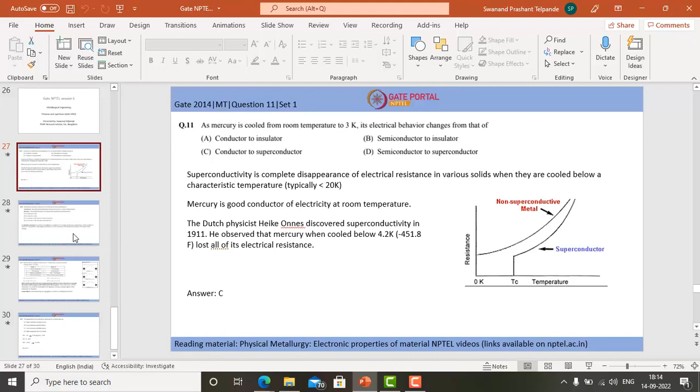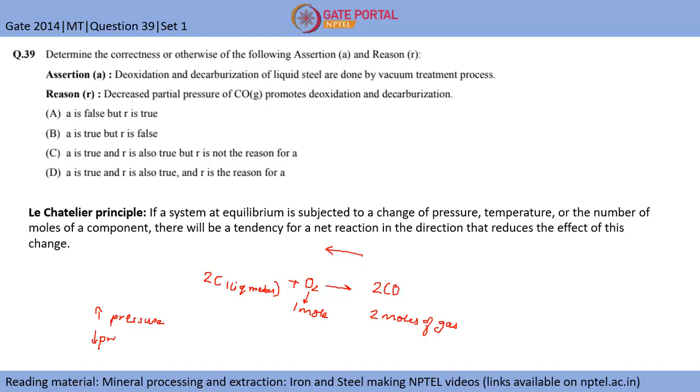So let's say we apply more pressure; let's go the reverse way. If high pressure is there, 1 mole of gas is giving 2 moles of gases. So if we increase pressure, the reaction will move backward, which will in turn increase the carbon content in the material. Now let's go the other side, decrease the pressure, which basically means vacuum creation.

Now according to Le-Chatelier's principle, as the pressure is decreased, this reaction will move towards the right. So more carbon monoxide will be there, hence this will drop. The concentration of carbon present in the liquid metal will drop. So deoxidation and decarburization of liquid metal are done by vacuum treatment process because of this reason.

And the reason they are stating is that decreased partial pressure of carbon monoxide promotes deoxidation as well as decarburization, which is true. So the correct answer is option D, where A is true and R is also true, and R is the reason for A. Basically we have to generate more carbon monoxide so that the carbon should be out of the metal.

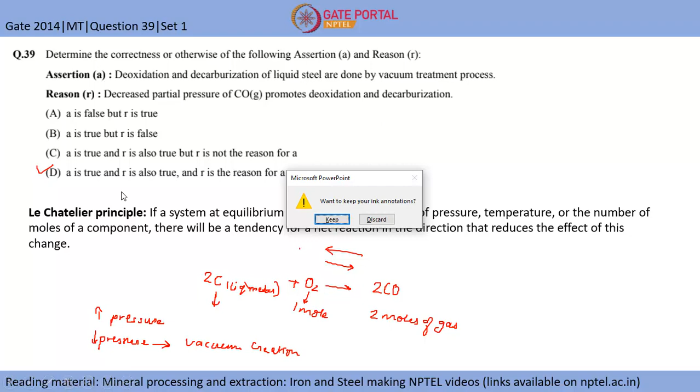I hope this is clear. Is this clear? Le-Chatelier's principle.

Okay, so basically you need to learn in extractive metallurgy. The basic point is you need to know what reactions will be there in what cells. If you consider deoxidation, then some deoxidizers are added, like aluminium, so alumina will precipitate out in slag. So in these conditions you need to know what is the exact thing.

So the main thing in extractive metallurgy is you should know all the reactions, you should know Le-Chatelier's principle, and you should be able to apply it correctly to answer whether vacuum will assist things or whether high pressure will assist the reaction. The effect of pressure, effect of temperature, and effect of moles, how all these three variables play a role in whether the reaction is moving forward or backward. That you need to know in extractive metallurgy, and these types of questions will be repeatedly asked.

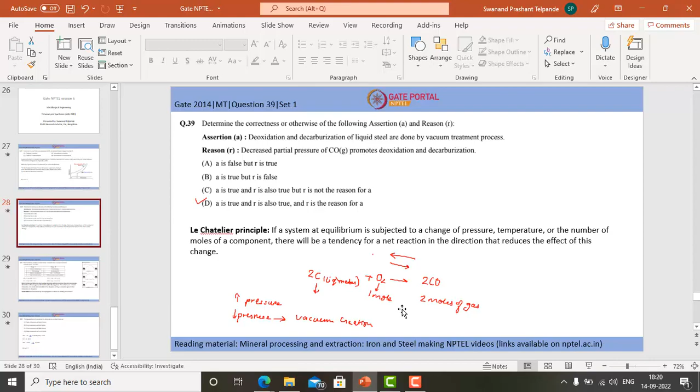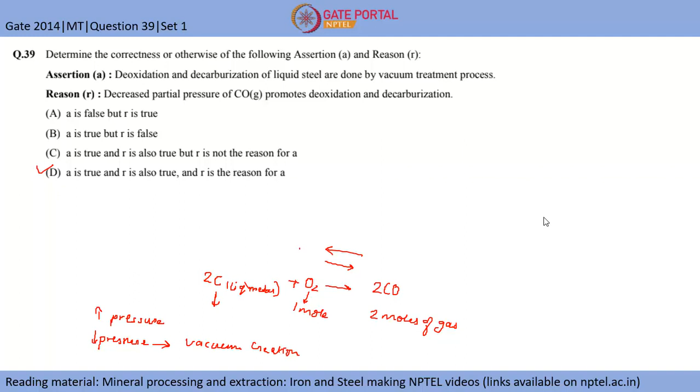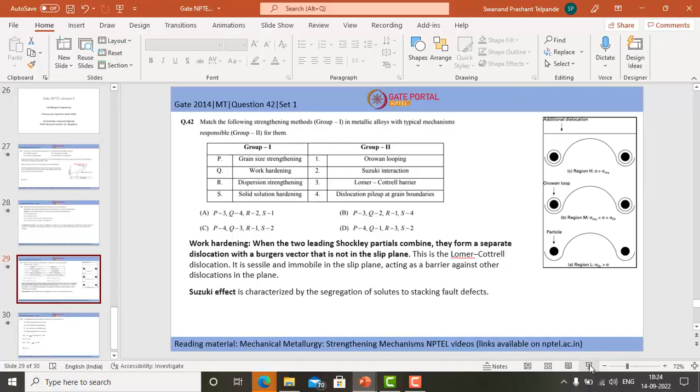This is question number 42, GATE Metallurgical Engineering 2014 question paper. Match the following strengthening methods in group 1 in metallic alloys with typical mechanisms responsible in group 2. Group 1 consists of grain size strengthening, work hardening, dispersion strengthening, and solid solution hardening. And the mechanisms are Orowan looping, Suzuki interaction, Lomer-Cottrell barrier, and dislocation pileup at grain boundaries.

So firstly, what is grain size strengthening? Grain size strengthening is also termed Hall-Petch strengthening. In Hall-Petch strengthening, let's say we have a material with larger grain size, and a material with very small grain size. So this is a material with small grain size. When dislocations are coming, they are stopped by this grain boundary because the orientation of this grain is not the same as this grain.

So Hall-Petch tells us that when these dislocations come to this grain boundary, we require additional stress for the dislocation to start slip in this grain. If I zoom in, consider this as one grain. The orientation of this grain is like this, whereas the orientation of this grain is like this, and these are the slip planes. So if this dislocation encounters this grain boundary, we require additional stress so that it moves on this slip plane in the neighboring grain.

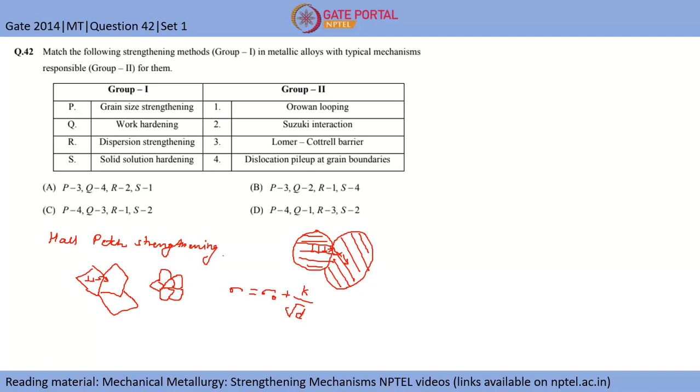Sir, one minute. Sir, please repeat again. We require additional stress for... Okay, I will repeat it. Just a second.

So let's say I have 2 grains. These are the slip planes. Let's say we are taking an FCC material and these are 111 planes. My loading axis is this; I am loading it like this. So these 111 planes are at 45 degrees to the loading axis. So the slip will initiate in this grain first, right? Because it is 45 degrees, the shear stress will be maximum on these planes.

Now consider another grain, where the 111 planes are differently oriented. Let's say it is like this. So let's say this is a gliding dislocation on this plane. It encounters a change in slip plane, right? So it does not have enough energy to cross this grain boundary and start moving on this slip plane here. So this dislocation will get stuck here near the grain boundary.

Similarly, more dislocations slipping on this same plane will come near the grain boundary, which will lead to the pile up. This pile up near the grain boundary will create certain stress, and when it reaches a threshold stress, the dislocation will jump onto this slip plane and start slipping on that plane. Hence this increase in stress required for the dislocation to go into the other grain and start plasticity in this complete grain is basically the grain size strengthening.

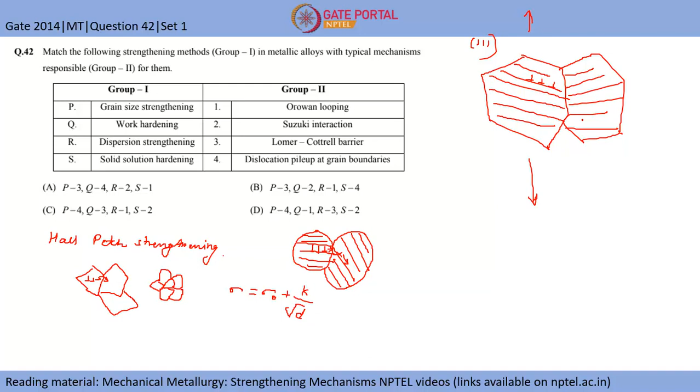Now coming to work hardening. In work hardening, let's consider the case of an FCC material. In FCC material, as you may know, Shockley partials are there. When two Shockley partials combine, they form a separate dislocation whose Burgers vector is out of the plane. Basically this plane is the 100 plane. Two Shockley partials moving in 111 planes combine to form a different dislocation with Burgers vector equal to the combination of B1 and B2, which lies in a different plane, not a 111 plane.

If that occurs, this dislocation, the combination of these two Shockley partials, cannot move because that is not the slip plane in FCC. So this forms a sessile dislocation, meaning the dislocation cannot move. Hence, if this dislocation is present in a material, it will cause trouble for other dislocations which are easily gliding. This is known as the Lomer-Cottrell lock. As it is sessile and immobile, it acts as a barrier for other gliding dislocations in that plane. Hence the work hardening is because of the Lomer-Cottrell barrier. So the correct answer for work hardening is option 3, Lomer-Cottrell barrier.

Now coming to dispersion strengthening. I will just draw. Let's say I have a material where different grains are there, and I have fine dispersoids present throughout each grain, and these dispersoids are incoherent with the matrix. I guess you know what coherency and incoherency are.

Basically, let me tell you, there is a slight difference between precipitate hardening and dispersion hardening. Here you can see the structure of this precipitate is like this, whereas in the matrix it's like this.

So what happens if this structure of matrix is coinciding with this? You will have coherent precipitate. Basically all these bonds will be attached to some or the other. So this is coherent precipitate. Now go on increasing the disorder of this matching.

So let's say I have a precipitate which is oriented like this, and I have a matrix like this. So this boundary between the precipitate and matrix is an incoherent boundary because no bonds are there here, whereas here the bonds were attached, however some coherency strains were there. So this is coherent precipitate and this is incoherent precipitate.

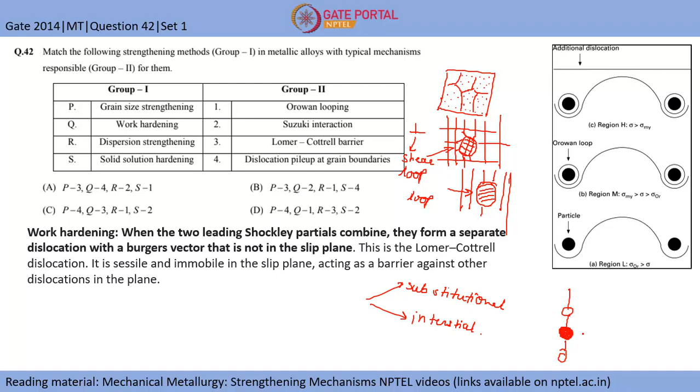Now coming to the fourth, which is the solid solution hardening. So basically solid solution consists of two things. One is substitutional and another one is interstitial. So let's say I have a matrix where one foreign atom is sitting. If it is sitting at a lattice point, then we term this as substitutional solid solution. Otherwise, if the atom is sitting at a non-lattice site, then we term it as an interstitial solid solution.

So let's say two Shockley partials are there, again the same example. These partials create a stacking fault between them. These solute atoms segregate to the stacking faults. Hence, if the dislocation is trying to come there, it will see a lot of solute atoms near that stacking fault, and the dislocation movement will be hindered because of this segregation, which will lead to strengthening. Hence, solid solution hardening is basically depending on Suzuki interaction as the prime mechanism.

And also, if we go in detail, if this atom size is greater than this, it will create some compressive stresses, right? So this foreign atom creates some stress field around it. The dislocation which is coming near to this atom will experience this stress field. So it will either get repelled or get attracted. So this interaction will also strengthen the material more.

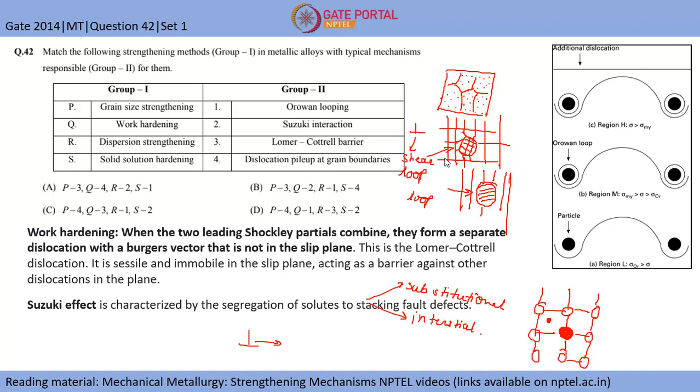Sir, one thing I have to ask. Ask. In grain size strengthening, we are promoting the force. So is that force on one particular plane or particular regions? It will be the force on the dislocation. It's not a particular plane or anything like that. It will be the force because of the interaction with the precipitate or, let's say, dispersoid. There will be some force exerted on the dislocation, right? So we are talking about that force. Okay, sir.

Any other doubt? You may find details about all these things in the NPTEL lectures, where I guess 3 lectures are there on strengthening mechanisms. There you can find everything regarding all these mechanisms. And you can tune the microstructure accordingly, if you are working in this area, to achieve maximum strength.

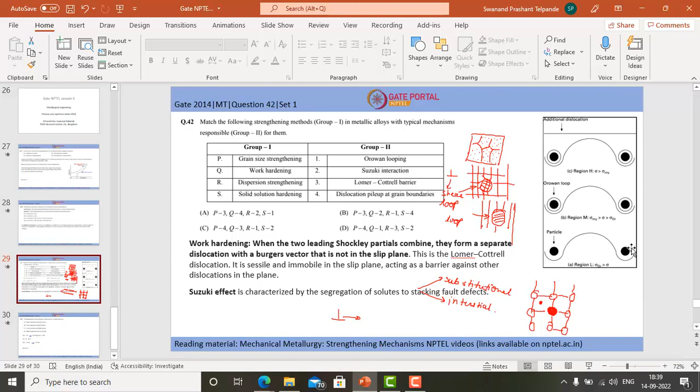Yes, sir. Okay, so we will go to the last question, which is again from extractive metallurgy. This will complete the 2014 GATE questions devoted to me. Then I will start with the 2012 question paper, where I will be focusing on mechanical metallurgy first, manufacturing processes, and a few here and there of physical metallurgy or extractive, if those questions are allotted to me. Okay, so I will come to the last question now. I will give you 2 minutes to answer this.

Here also, the reactions are important, as I already told you in the previous question. In extractive metallurgy, you should know all the reactions.

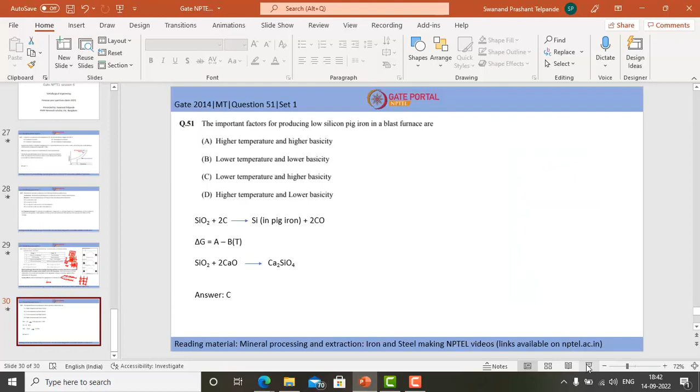This is question number 51, GATE 2014 Metallurgical Engineering question paper. The important factors for producing low silicon pig iron in blast furnace are: option A is higher temperature and higher basicity, option B is lower temperature and lower basicity, option C is lower temperature and higher basicity, option D is higher temperature and lower basicity.

So if you look at these reactions where the silica reacts with carbon, which is basically carbon from the coke, it gives rise to silicon in pig iron. So if this reaction is taking place, we are getting higher silicon in pig iron, and for every reaction there is some delta G, the free energy change associated with every reaction. So let's assume that for this delta G is A minus BT, where T is the temperature.

So let's say if we increase the temperature to a very high value, then the delta G will be negative, as you can see from the equation. So if delta G is negative, this reaction will be more and more favorable. So you will end up getting more silicon in your pig iron. So to retard this reaction, we require lower temperature.

And if you consider the second reaction, where silica reacts with lime, as you know, it's very highly basic. So if these two react, it will give rise to Ca2SiO4. So rather than this silicon going inside the pig iron, it will form a certain compound which is basically Ca2SiO4, and it will join the slag. Hence you will have less silicon in your pig iron. Hence the correct option is option C.